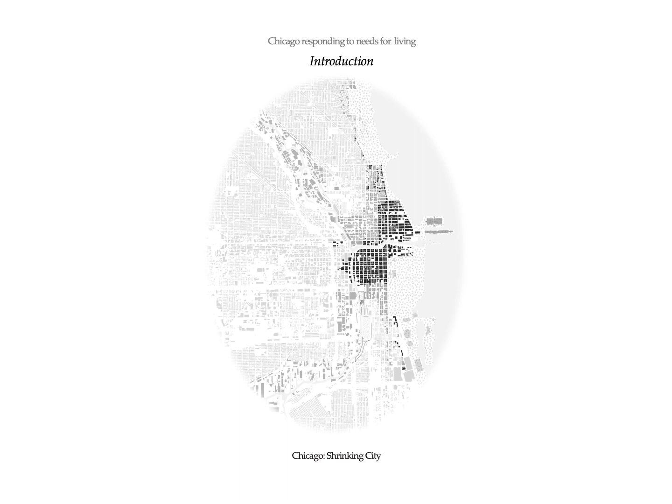The first chapter covers how Chicago responds to changing trends in industrial and housing use that affect land use patterns. Chicago is a city whose contribution to industry, architecture, and urban planning is an inspiration to many growing cities. However, it is also referred to as a shrinking city, where its population is declining faster than its natality rate.

Overall population is declining, but the neighborhood closest to the loop has experienced a population jump of over 15% since 2000. The neighborhoods to the west and south have reported a decrease in population.

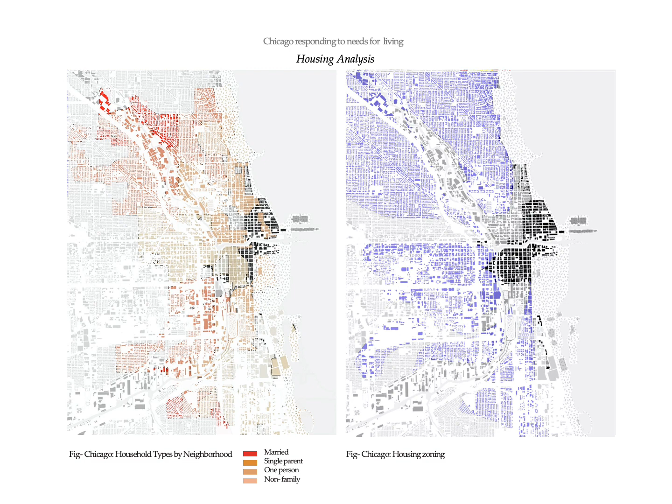The first image, of household types by neighborhood, shows that married couples live away from the downtown region, whereas single parents, one-person households, and non-family households live in the neighborhoods near the loop. The second image shows that according to Chicago's zoning codes, about 70% of residential plots are designed for detached single housing, contributing to the affordability problem in the city.

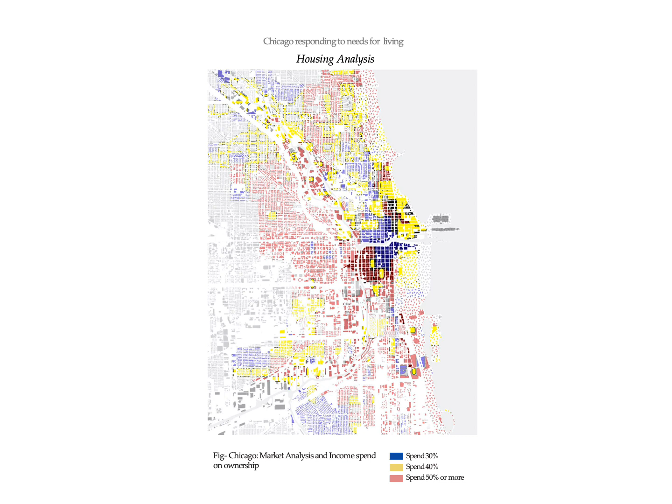Market analysis for Chicago housing shows that people spend about 30 to 40% of their income on housing ownership for living in and around the loop. Rates per square foot in Chicago are at their peak since 2012, contributing to high rental rates, which in turn results in people living in smaller apartments.

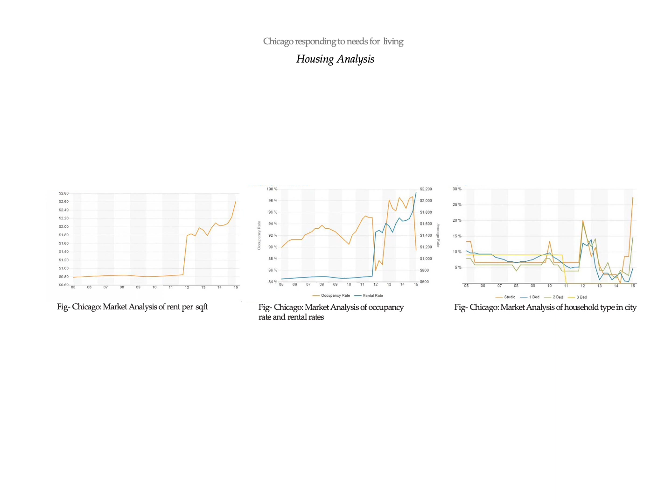Due to its location, Chicago had the largest market for lumber. It became the largest lumber district in the 1840s and hosted lumber-dependent industries. Until the 1860s, more than 200 boats were transported every day.

In the 1870s, lumber became important for other businesses like construction, furniture, wagon, and piano factories. Goose Island was also referred to as one of the lumber districts and was home to 13 lumber yards.

After the fire of 1871, there was a decline in the lumber business until 1925, when it became limited to local markets. Before the 1990s, the island was dedicated to industrial land use.

From heavy industry in the 1920s to light industry by 1986. After the 1990s, a mix of commercial and retail use occurred in Goose Island, with new residential development along the other side of the island. From 1990 to 2016, we witness a constant need for change from light to mixed land use.

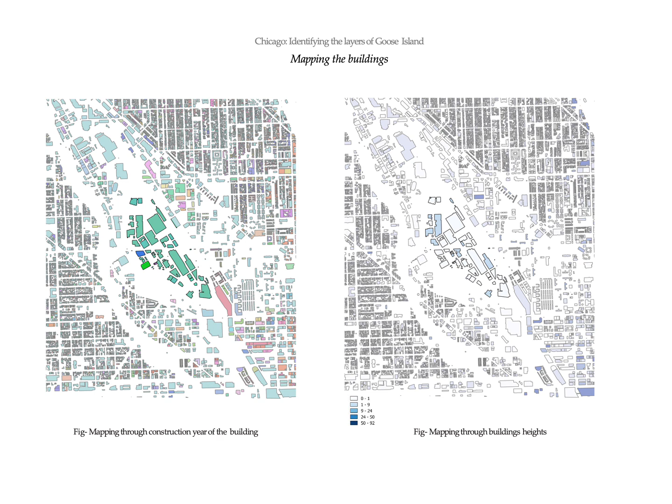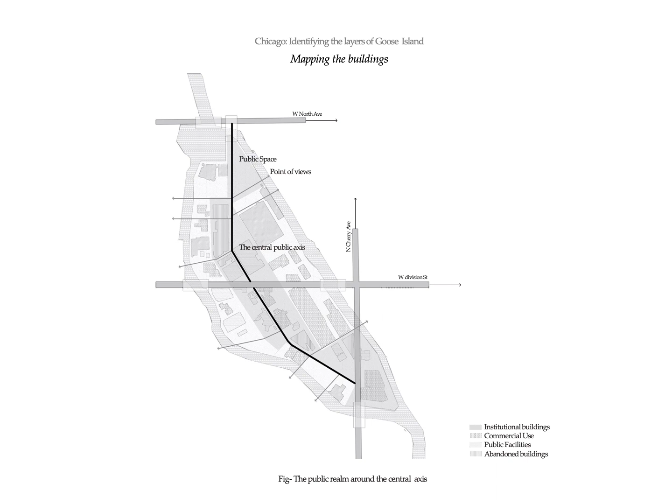Presently, Goose Island is a combination of industrial, commercial, and public facilities, but some buildings have lost their use and are now abandoned. As of today, the island is open for new development opportunities, which can be witnessed.

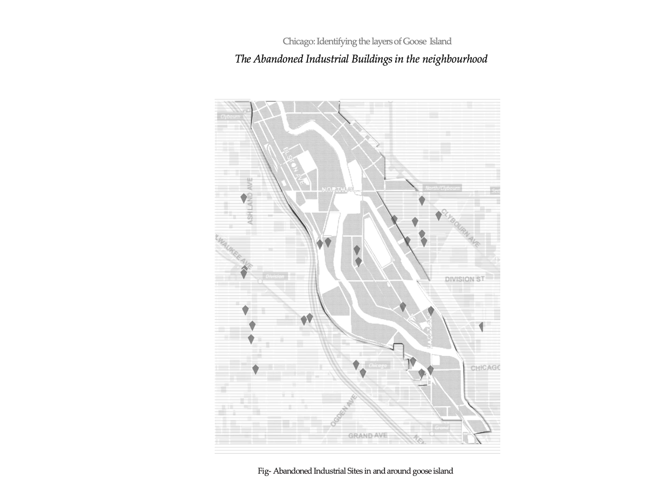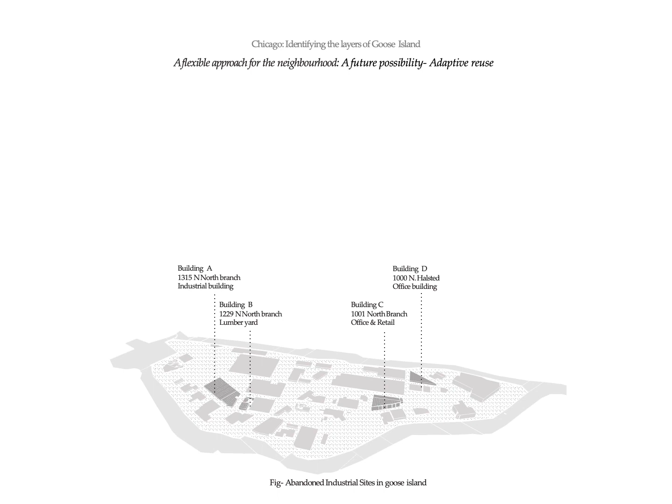In close proximity to the island, more than a dozen abandoned industrial sites can be witnessed. Out of all, there are 4 abandoned buildings on the island that have lost their use since their construction. They are all aligned at the central axis across the public facilities.

For instance, Building B was designed as a lumberyard in 1935 and lost its use around 1980. The building is well connected with streets on 3 sides and shares one side with a public facility building.

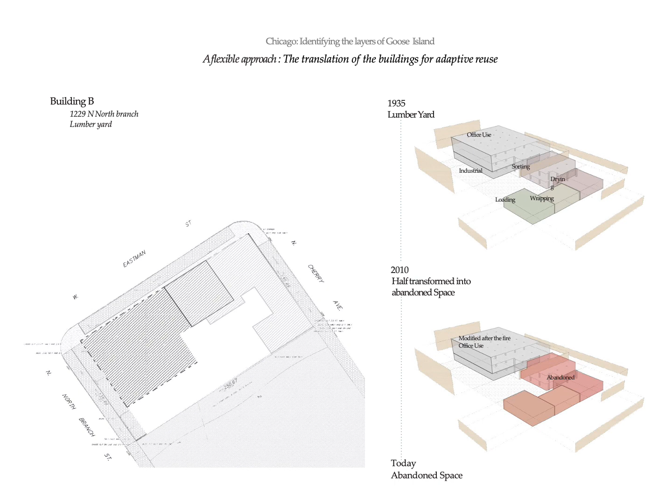There is a hierarchy in the building height, with 3 stories from North Branch Street, then 2 stories, and 1 story from North Cherry Avenue at the rear end of the site.

The building structure was inspired by the balloon framing method of construction, combining wood with load-bearing walls supported by wooden beams in one direction.

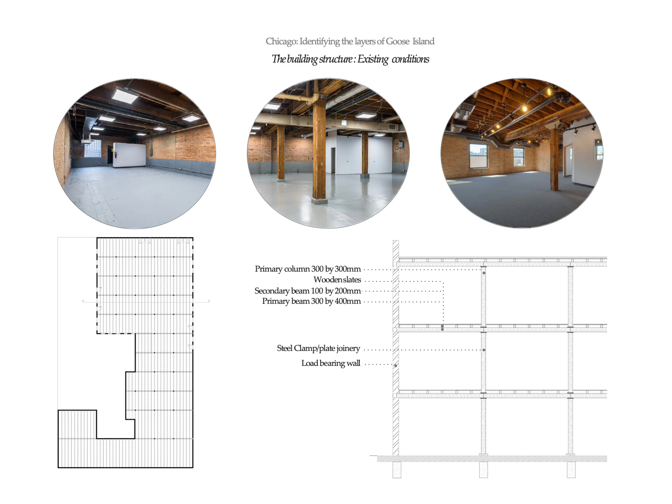The building structure is designed on a grid of 6 by 6 meters, and at the rear end of the building the span changes to 9 meters.

Now moving to the third chapter of the presentation, which focuses on living needs of the people, considering space as a component to modify as the needs of the people constantly change.

In pre-industrial times, households were integrated with commercial activities. Then during the industrial city, economic growth resulted in a concept of planned cities, where housing and industries separated and moved far away.

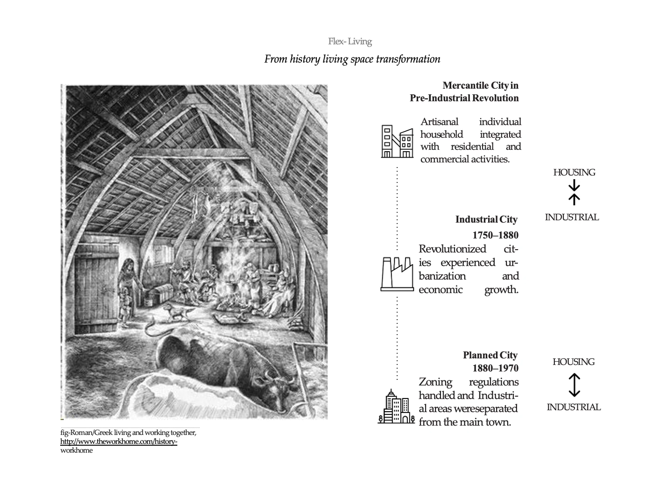The concept of time-based architecture suggests that buildings should be designed in a flexible way so that they can alter when the needs of the people change, corresponding to future needs.

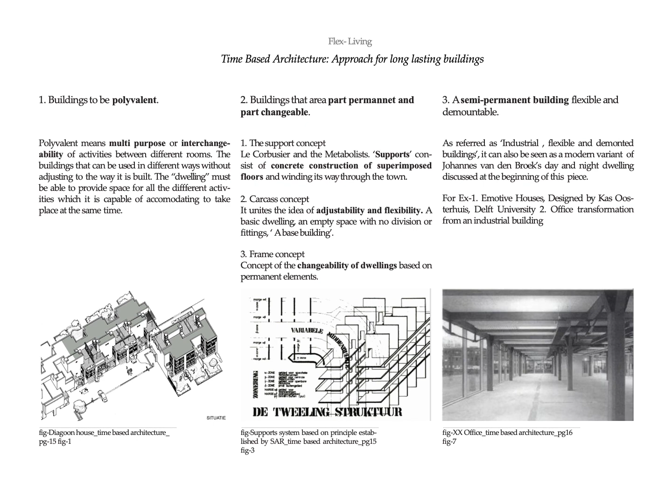For that, the building should be designed, first, for more than one function, like a Diagoon house. Second, should be part permanent and part changeable, according to the concept of supports by Corbusier. Third, should be designed with flexibility to demand.

From history, models were designed that can be flexible and transformable, like in 1911 Frank Lloyd Wright's Robie House with open plan, 1923 Corbusier with Minimum Home, 1929 Mies van der Rohe for continuous space, and Buckminster Fuller's Dymaxion House for mass production, 1964 Archigram's Plug-in City, and the flexible model of Nakagin Capsule Tower.

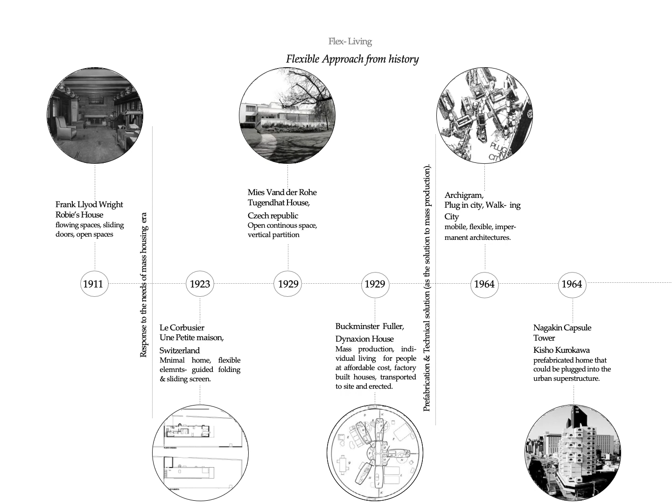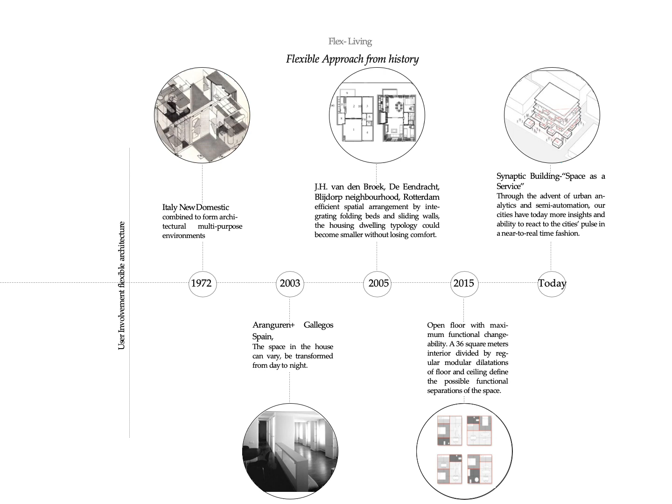1972 Italy's New Domestic Landscape for furniture adaptable solutions, 2003 an apartment space with variable doors in Spain, 2005 a Dutch architect designs spatial arrangement in Rotterdam, 2015 open house plan on a grid of 36 square meters, and today with synaptic buildings for space as a service.

As a conclusion to the models of flexibility from history discussed before, the strategies for function transformation are: first, the plug-in, where a space can be attached to the surface with modification involving horizontal and vertical planes.

Second, shared space, where all the services are combined at one side and leave the rest of the space flexible. Third, unfinished space, where all the services and shared spaces are combined at one level, leaving the possibility for flexible space at other levels.

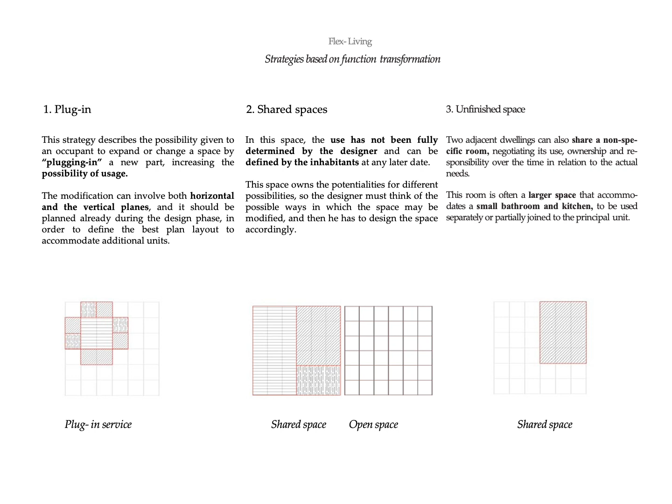Strategies for space transformation are: first, sum and split, where two adjacent spaces can combine to form a larger space and vice versa. Second, movable walls, easily arranged and reconfigured for new functions on a daily basis or in a long-term manner. Third, folding, changing the purpose of the space on a daily basis with hiding elements for the function.

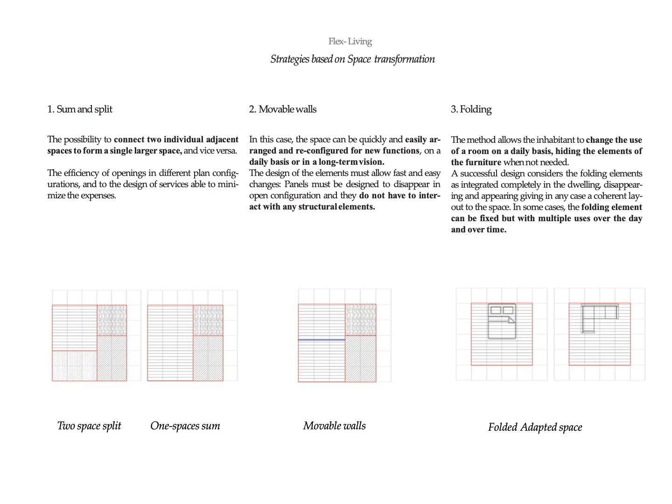Different functions may or may not occupy the same amount of space, but no two functions are performed at the same time. The components of space can be designed for sharing different functions with modification; only one function is performed at one time.

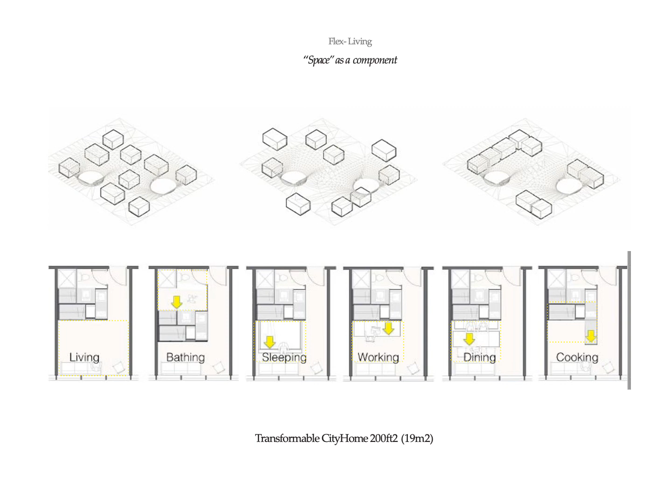There are three elements for transforming the function of a space. First, immobile units, which comprise fixed space, basically all services like showers, kitchen, and bathroom. Second, infill systems, with variable doors and walls. Third, flexible adaptable spaces, which can be modified on a daily, monthly, or yearly basis.

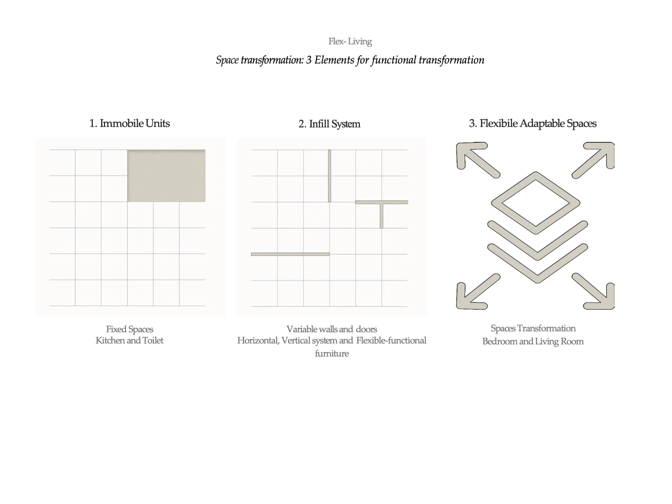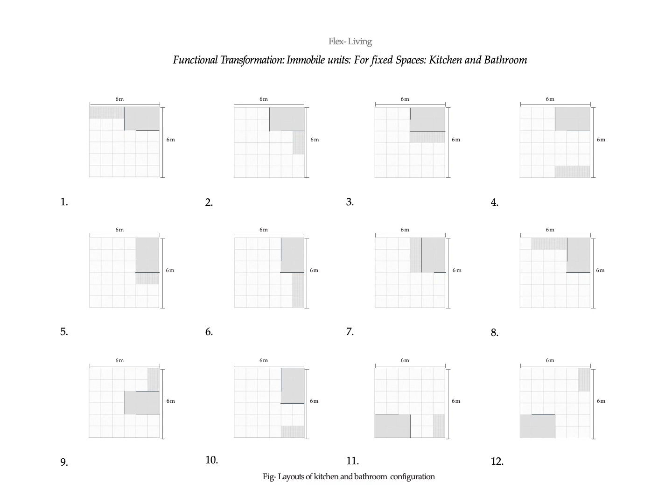For the first element, immobile spaces, 12 layouts have been prepared that give the user flexibility to choose their own layout for the placement of fixed space, that is bathroom and kitchen, on a grid of 6 by 6 meters. For instance, a 3 by 2 meter space is considered for the bathroom and an open wide kitchen is considered, which can be modified and the spaces can be altered, but these configurations can help the user choose their own layout.

For the second element, infill systems, there are 5 different flexible solutions for variable walls and door systems: demountable panels, folded doors, sliding doors, single leaf and double leaf, and segmented doors.

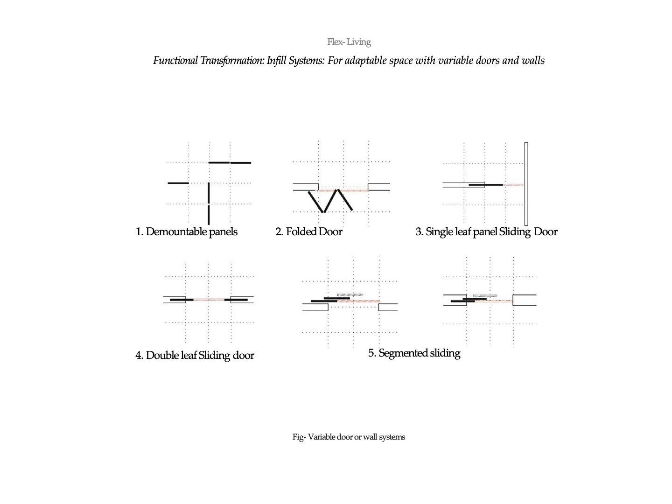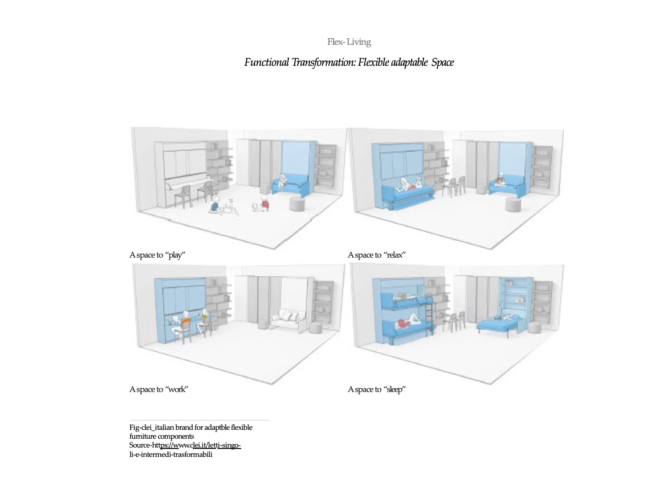Now moving on to the third element, the adaptable space component, which provides versatility to the space that can be converted for different functions according to users' needs, to play, relax, work and sleep. These are basically adaptable furniture systems that are now provided by many companies for adaptable solutions.

After combining the 3 elements of function transformation with 3 types of flexibility, that is convertibility, versatility, and expandability, a module of 6 by 6 meter space is tested, defining elements and types of flexibility. These illustrations demonstrate convertibility and versatility of space to adapt to different functions like eat and relax.

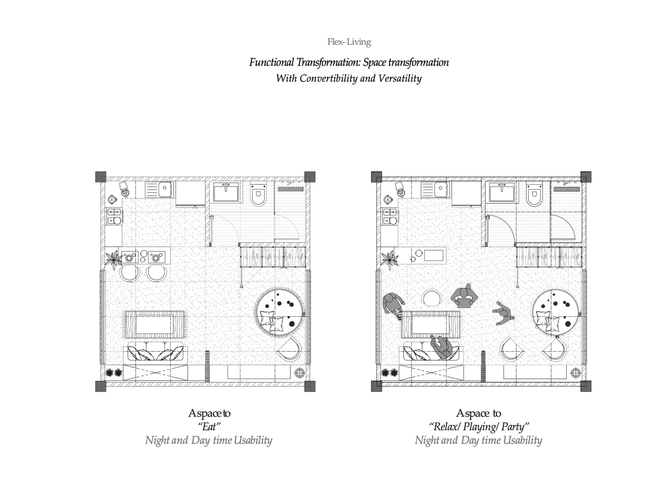In the same manner, the space can be modified for work and sleep on a daily or weekly basis. In the illustrations before, polyvalency of the space is defined, where the space is used for more than one function. The space used for working, sleeping, and relaxing are shared and can be modified. A space that remains multifunctional all day depicts convertibility and versatility.

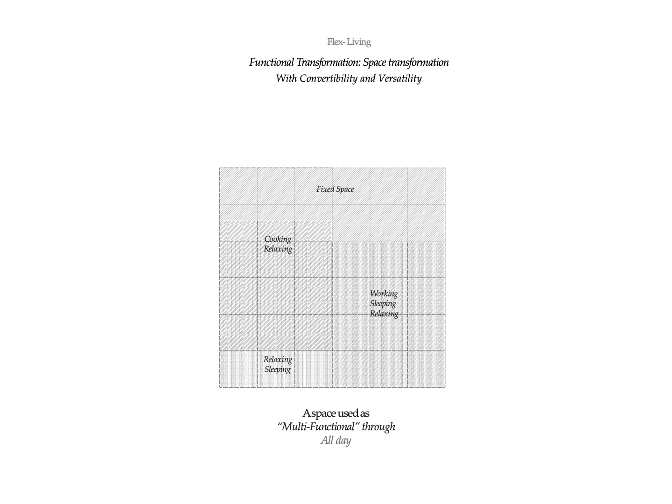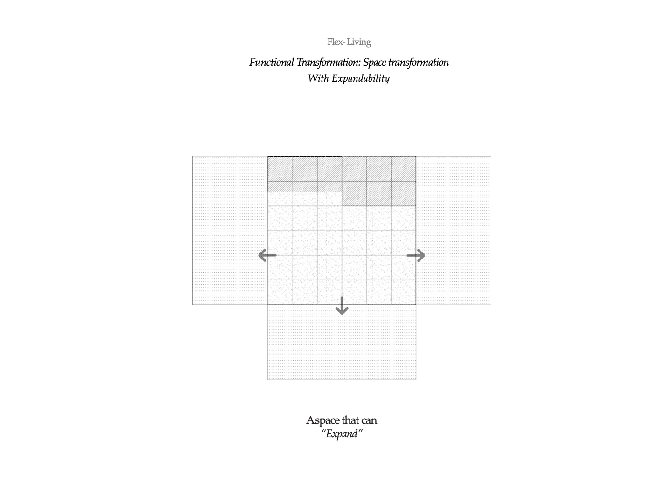The third type of flexibility involves expandability, where the space can be expanded according to the needs of the user. In this design, it gives an opportunity to expand in 3 ways. For a unit to be flexible, it should be convertible, versatile, and expandable. There are 2 illustrations for transformability of a space.

The fourth part of the presentation focuses on planning a flexible, human-oriented space which can be modified on a daily, weekly, or monthly basis. For Building B, the structural grid of the abandoned building is combined with the flexible space module of 6 by 6 meters. Modifications are done where part of the building is restored and the rear end of the building structure is extended in order to redesign the building to adapt to different functions.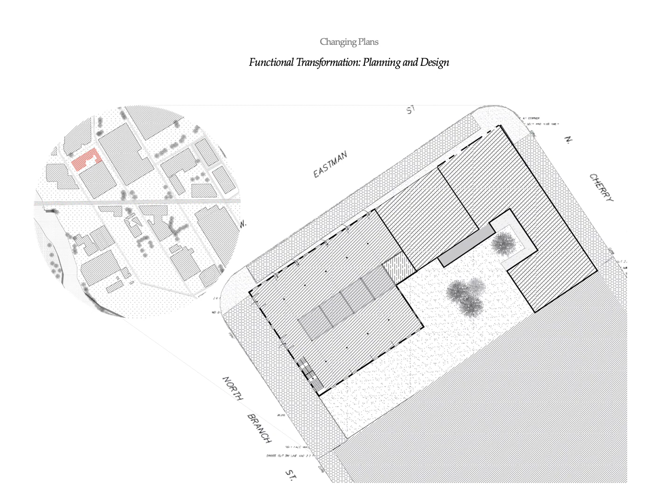On the ground floor, the structure of the first block, which is 3-story, is restored and designed as a flexible, free multi-space where people can rent the space they require for a particular activity, which can be separated with the use of variable walls and door systems. At the rear end of the building, where the span was 9 meters, it is divided by the addition of new members and designed as a flexible living and working combination typology.

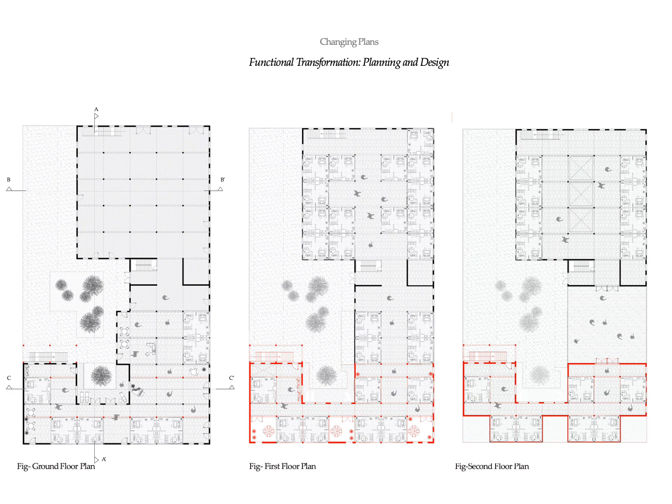On the upper floors, the building structure is restored and extended at the rear end of the building, designed with units at the periphery and a wide, open flexible space in the middle. The flexible space is inspired by the Moriyama House in Tokyo, where the units are placed and the rest of the space is shared, defining public and private, individual and collective, personal and shared spaces.

The structural elements for building transformation majorly comprise 3 elements. First, addition of new structural members for extension of the structure. Second, addition of a floating floor on top of the existing floor that will provide acoustic and heat insulation to the building. Third, introducing new openings in the existing roof, as the facade is load bearing.

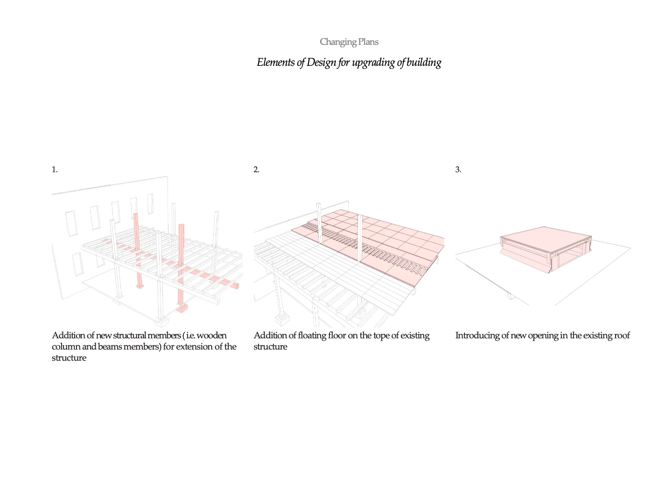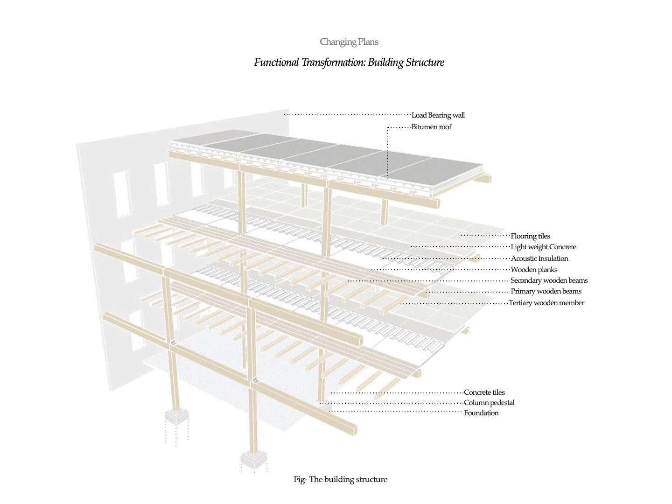The structure, when combined with old and new elements, works as one system for the building, a combination of wooden, load-bearing members and a concrete floating floor. The overall visualization of the building shows a comparison between what is new and old.

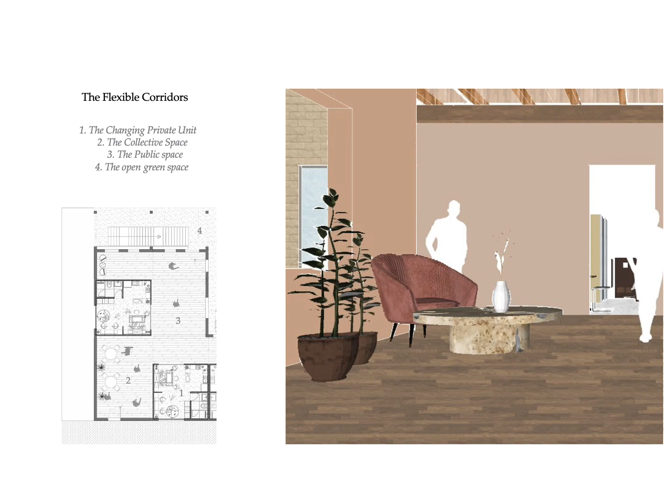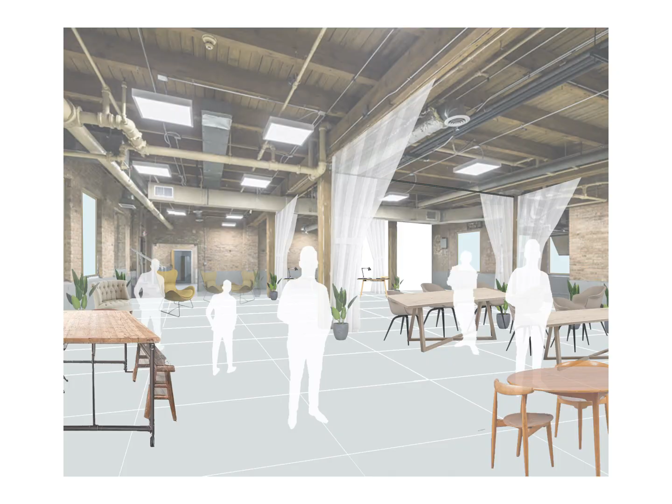For experiencing the building, the multifunctional space. The terrace connecting the buildings with a view of the city. The flexible corridors, and the building surrounded by a view from the street.

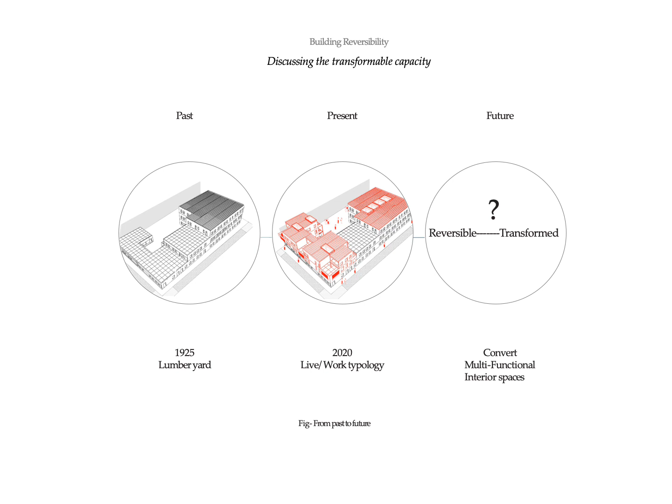Now the question arises: what next can happen from its past to present, and what will be the future, whether the building is flexible to undergo any transformability or even reverse. Research done by Elma Durmisevic on transformable buildings suggests that the building is transformed in terms of its spatial and technical reversibility. The flexible unit space of 36 square meters can expand, shrink, or be replaced, which can further give spatial and technical reversibility.

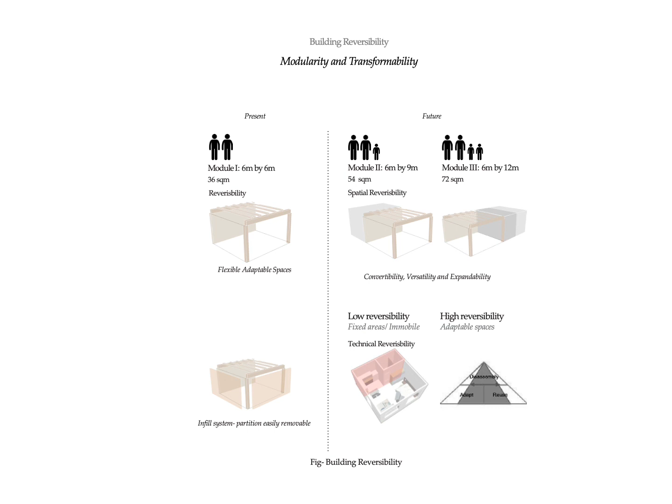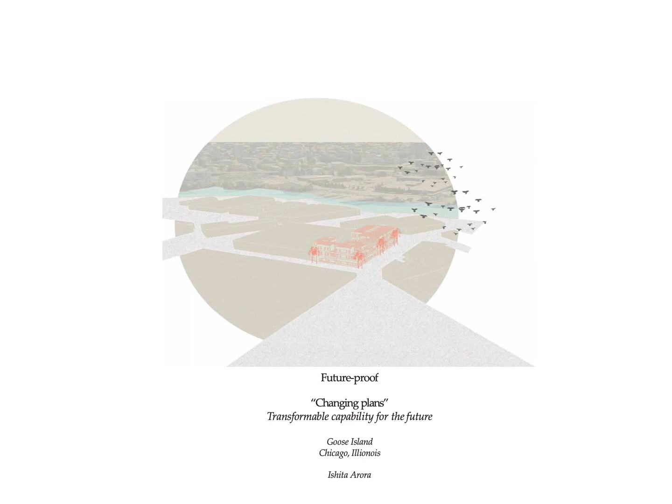The flexible module is expandable or shrinkable, with a system of infill systems to reverse and disassemble. The design of the building is a response to the changing needs of people. The project tries to form a circular life cycle of the building and proposes that the building should be designed to provide flexible solutions for any function. By this approach, future-proof architecture can be created.